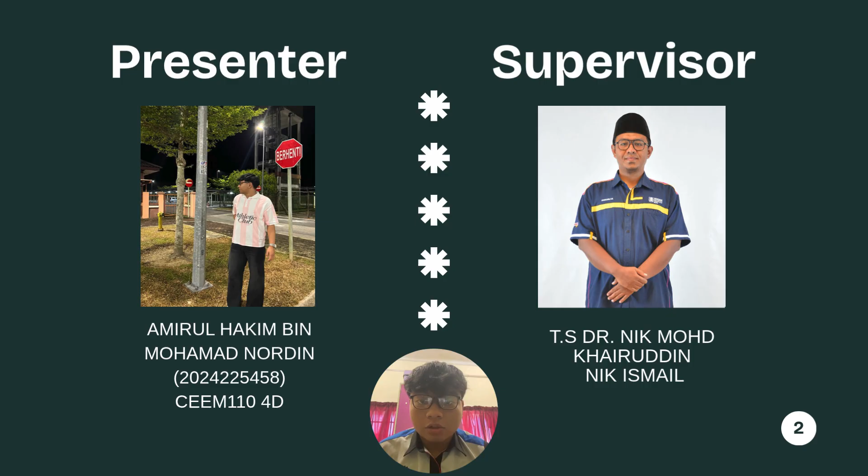My full name is AMIRUL HAKIM bin MOHAMAD NORDIN. My student ID is 2024225458. I'm a mechanical engineering student, CEEM 110 from class 4D, and my supervisor is technologist Dr. Nik Muhammad Khairuddin Nik Ismail.

This is the abstract of my proposal. Ecotourism riverboats are increasingly used to support sustainable tourism and environmentally friendly transportation. The structural integrity of these vessels depends greatly on the framing systems, and inadequate designs may lead to excessive deformation and safety risks. However, limited studies have focused on the structural performance of framing systems for small ecotourism riverboats.

Therefore, this project aims to design a suitable framing system and evaluate its strength characteristics. The study employs literature review, conceptual design development, CAD modeling, and material selection under static loading conditions. The analysis provides information on stress distribution, displacement, and factor of safety, resulting in a safe and efficient frame design.

The findings contribute to the development of sustainable river transportation. Nevertheless, the study is limited to static loading conditions, and future work should consider dynamic loading and experimental validation.

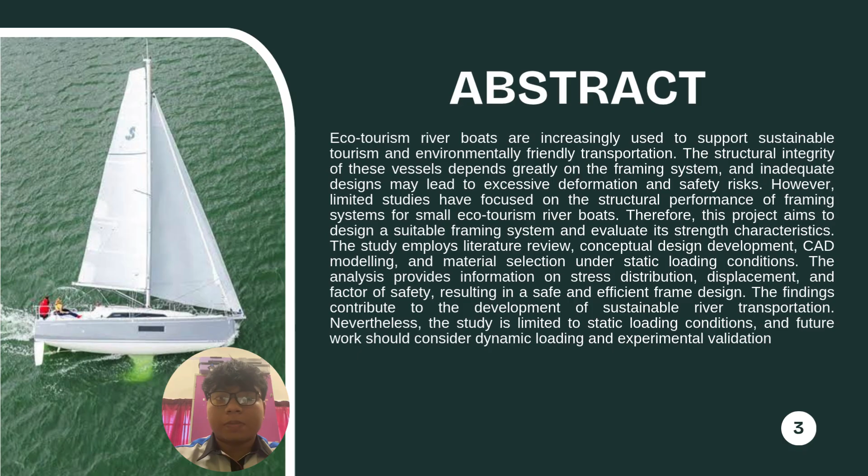Ecotourism riverboats are becoming increasingly popular because they support sustainable tourism and environmentally friendly transportation. To ensure safe operation, the structural framing system of the boat must be properly designed. The framing system acts as the skeleton of the vessel and supports loads generated by passengers, equipment, and water forces.

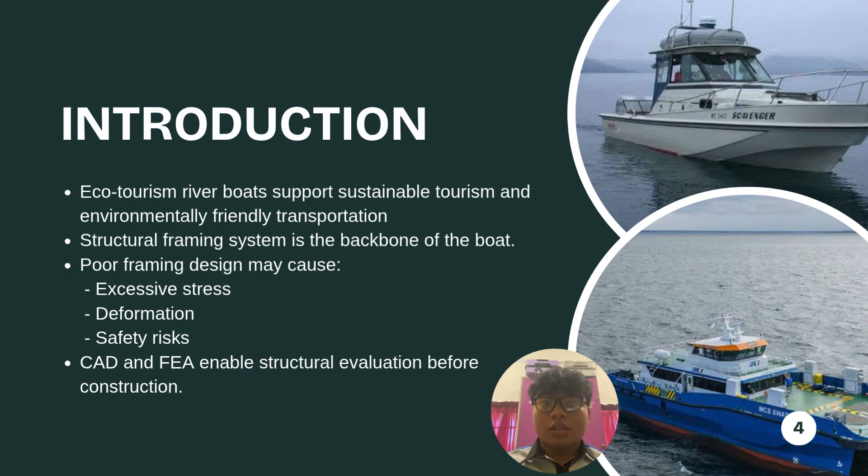With the advancement of computer-aided design or CAD and finite element analysis or FEA, engineers can evaluate structural performance before the boat is physically constructed. Therefore, this project focuses on designing and analyzing a framing system that is both safe and efficient.

Next, we move on to the background of study. River transportation offers an efficient and environmentally friendly mode of travel. Modern riverboats are designed to be lightweight, durable, and safe for passengers. One of the most important components of a boat is its structural frame. The frame supports the hull and distributes loads throughout the structure.

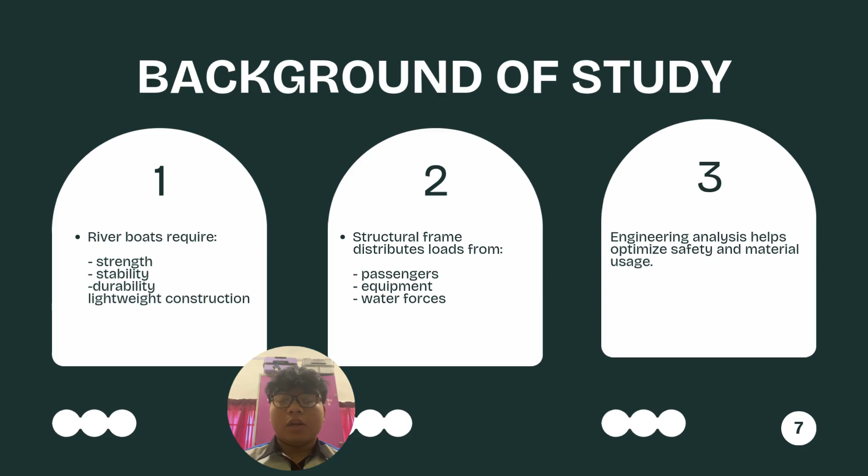Nowadays, engineering software allows designers to analyze structural behavior digitally before manufacturing it. This reduces development costs, improves safety, and helps optimize the balance between strength and weight. Therefore, this study focuses on developing and evaluating a riverboat framing system using engineering analysis methods.

Next is the problem statement. The structural frame plays a critical role in ensuring the safety, stability, and efficiency of a riverboat. Current issues such as improper frame design will lead to high stress concentration in critical areas. Moreover, poor frame design may lead to excessive stress, deformation, and unnecessary structural weight. This can affect the performance of the vessel and increase material consumption.

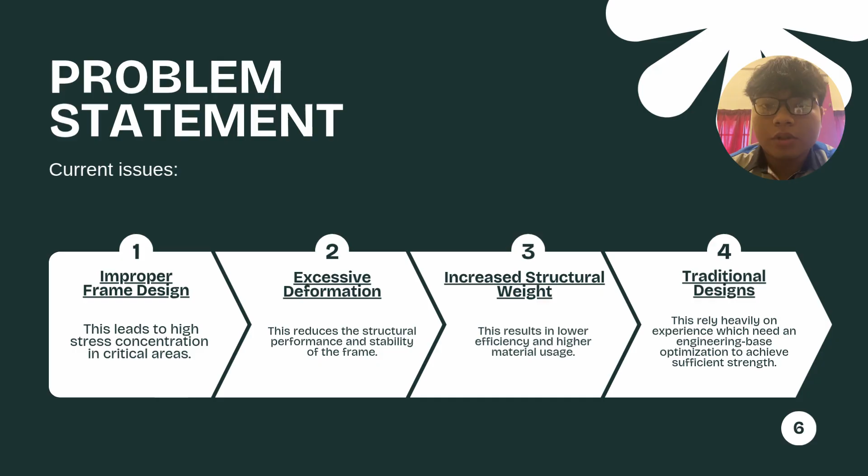Another issue is increased structure weight. This results in lower efficiency and higher material usage of the boat. In addition, increasing passenger loads requires strong structures without compromising the efficiency. Many conventional boat designs still rely heavily on experience rather than detailed engineering analysis. Therefore, there is a need to develop and evaluate a framing system using engineering principles and structural analysis techniques.

We move on to the objectives. There are two main objectives in this project. The first objective is to design a framing system for an ecotourism riverboat based on structural and operational requirements. The second objective is to determine the factor of safety, or FOS, of the designed framing system under specified loading conditions. These objectives will help ensure that the proposed design is safe, reliable, and structurally efficient.

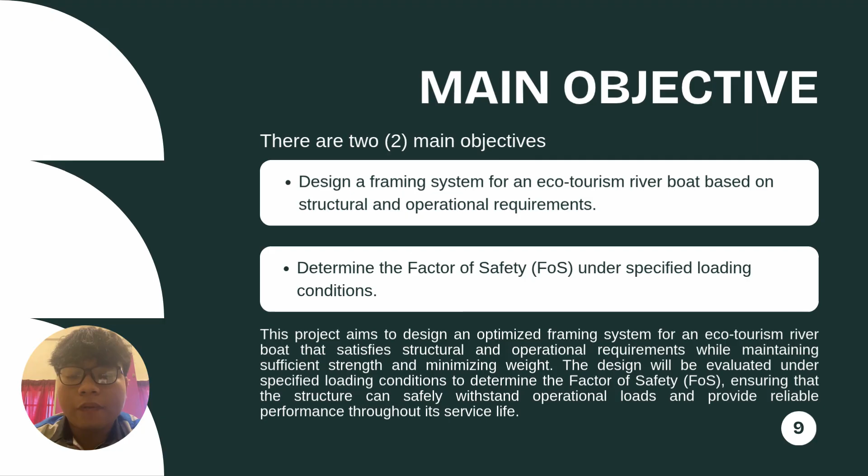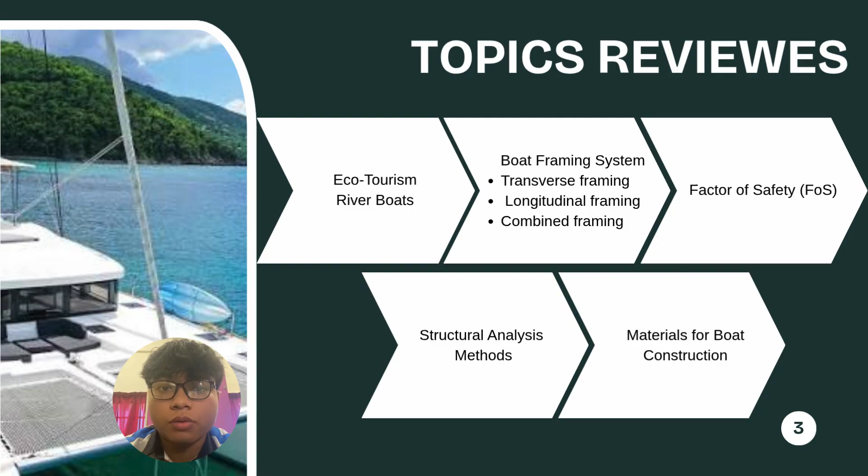Next is the literature review. This chapter reviews previous studies related to ecotourism riverboats, framing systems, structural analysis, and material selection. Three main framing systems were identified, namely transverse framing, longitudinal framing, and a combination of both. The review also highlights the importance of factor of safety in boat design and discusses how structural analysis methods such as finite element analysis can be used to predict stress and deformation before construction.

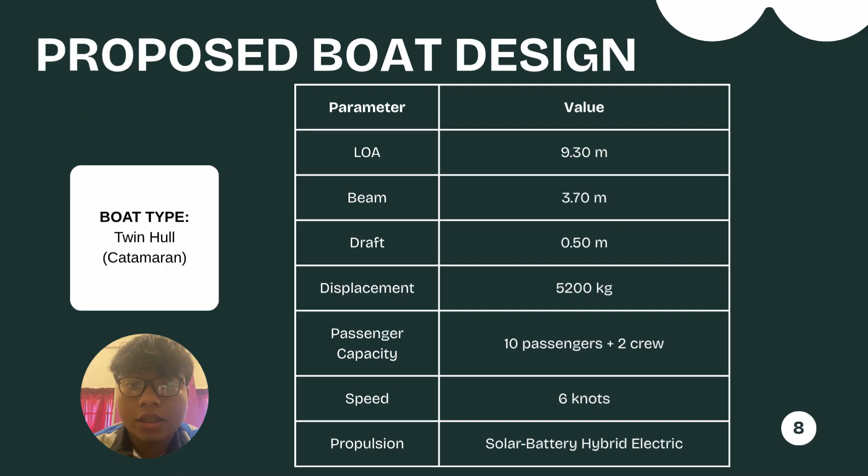This is the proposed boat design. The preliminary design adopts a catamaran or twin hull configuration. A catamaran was selected because it offers better stability, a wider deck area, and improved passenger comfort compared to a conventional monohull design. The proposed boat has a length overall of 9.3 meters, a beam of 3.7 meters, and a draft of 0.5 meters. The vessel is designed to accommodate 10 passengers and 2 crew members. In addition, the propulsion system is based on a solar hybrid electric system, making it environmentally friendly and suitable for ecotourism operation.

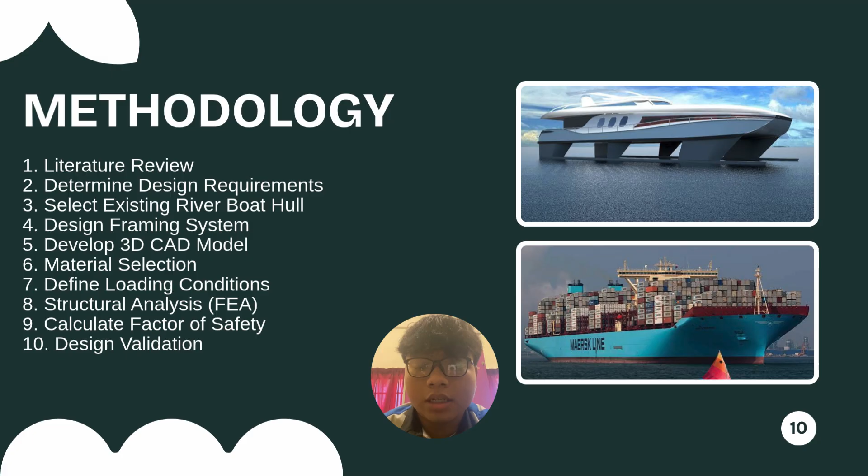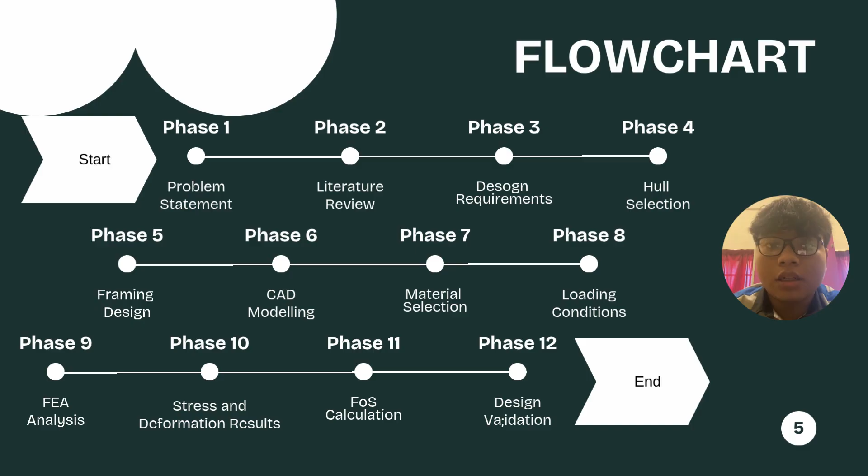This flowchart summarizes the entire research process. The project starts with problem identification and literature review, followed by design requirement determination and hull selection. Next, the framing system is designed, modeled in CAD, and assigned suitable materials. Loading conditions are applied, and structural analysis is performed. The results are then used to calculate the factor of safety. If the design is not safe, modification will be made before final validation.

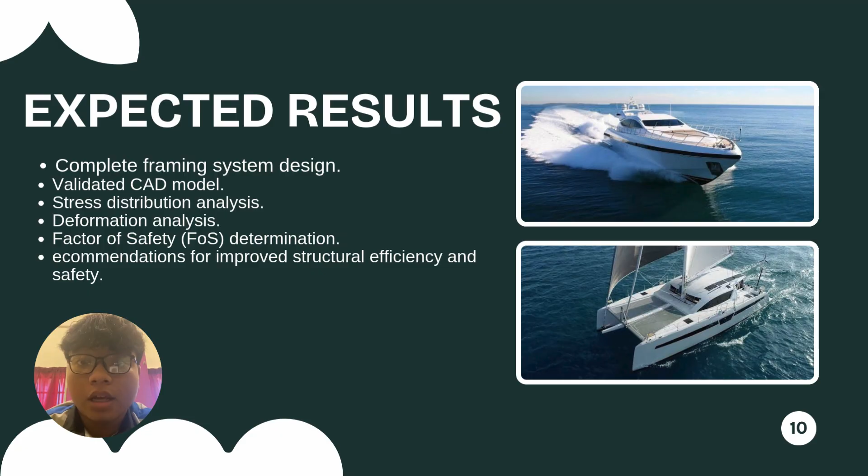The expected outcomes of this project include a complete framing system design for an ecotourism riverboat and a validated structural model. The study is also expected to provide stress distribution and deformation results under specified loading conditions. Furthermore, the factor of safety of the framing system will be determined. Finally, recommendations will be provided to improve structural efficiency and safety.

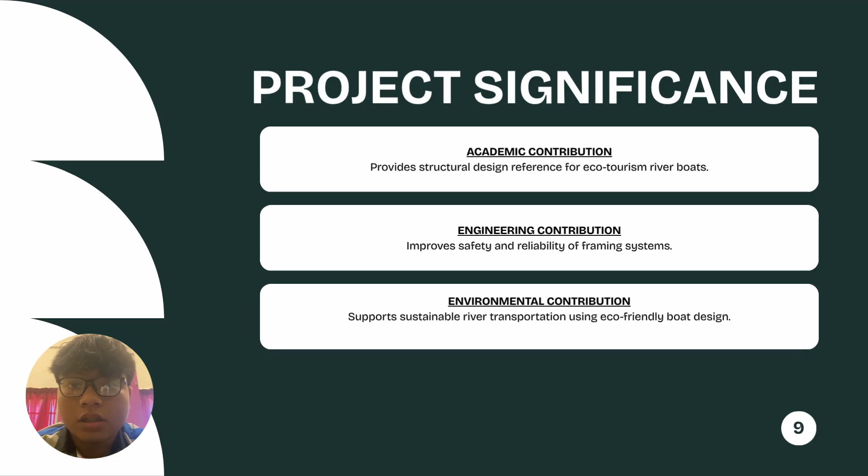This project contributes to the development of safer and more efficient ecotourism riverboats. From an engineering perspective, it provides a better understanding of structural behavior and framing system performance. From an environmental perspective, the project supports sustainable river transportation through the use of an eco-friendly vessel concept.

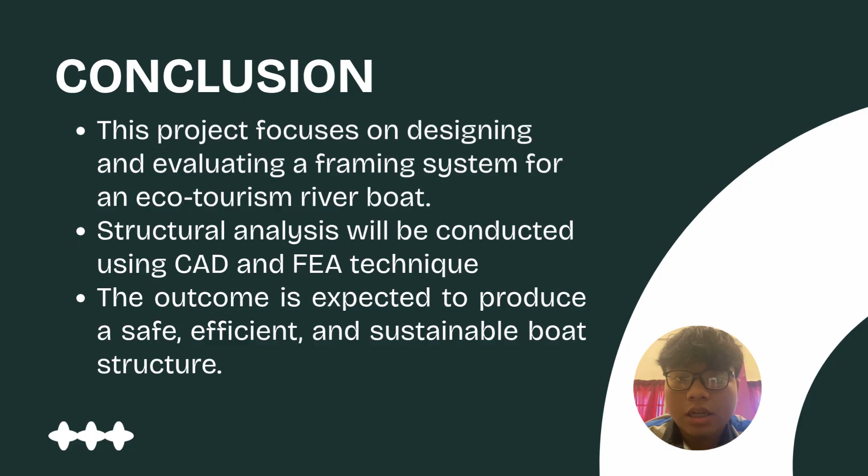For conclusion, this project focuses on designing and evaluating a framing system for an eco-tourism riverboat. Through CAD modeling and structural analysis, the study aims to develop a safe, lightweight, and efficient framing system. The findings are expected to contribute towards the advancement of sustainable river transportation.